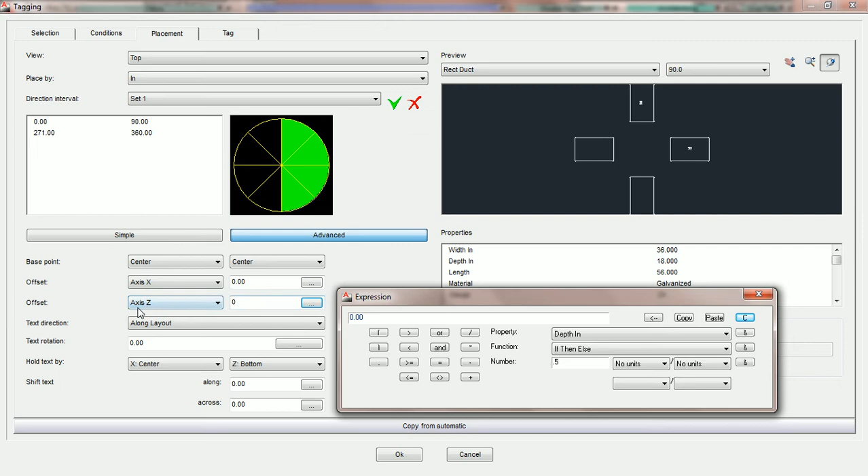What we're going to do is show you just one use for having formulas calculate your offset parameters for you. Right now we have the z-axis parameter set as 0, so the offset is 0 on the z-axis. We're going to press OK and run an automatic.

And you can see here that this automatic is running a length tag at all the proper positions. However, because the axis z is 0, the tag is in the dead center of the duct. And once again, if we put this on the left view, you can see that the tags are all placed perfectly in the center of the duct if that parameter happens to be 0.

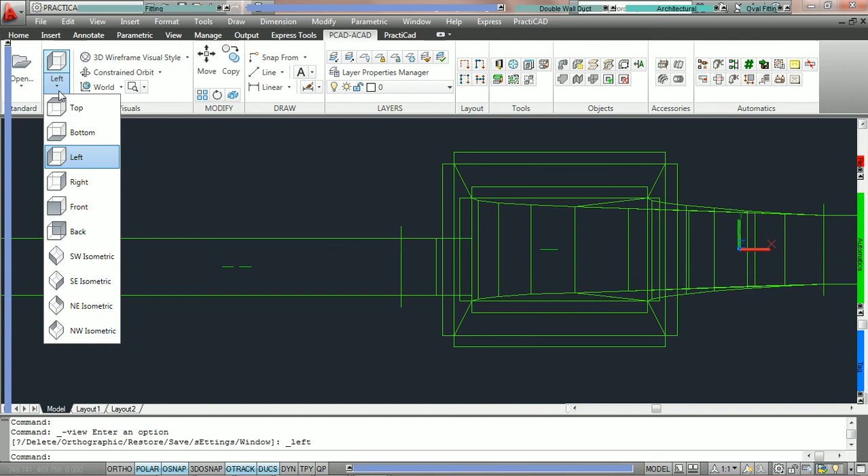Now what we'd like to do is make it so that we can have PractiCAD help us see these tags even when we're in a different visual style. For example, if we go into the hidden visual style, we cannot see the tags because they're inside the duct.

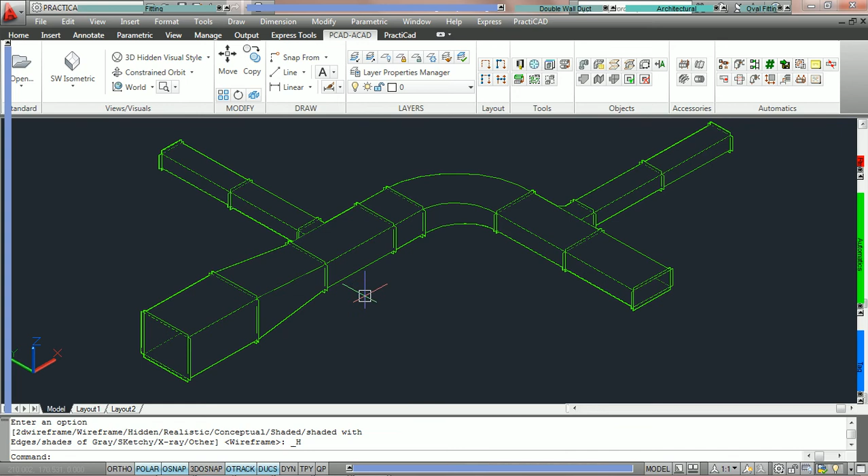Now though we showed you how to put the proper parameter for offset Z to get the tags to be higher than the duct, the problem is you're going to have different ducts of different depths on your drawing. And if you click on this duct here and look, the depth is 30 inches. So since the tag is in the center of the duct, the tag is sitting 15 inches into the depth.

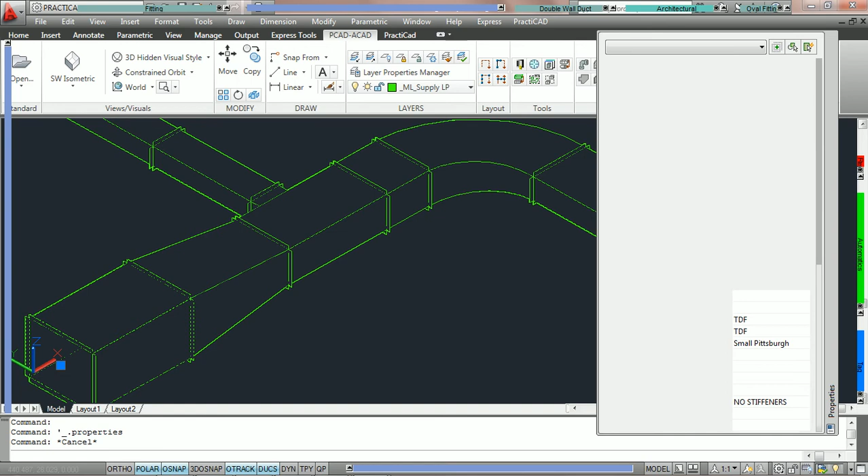That means if we want the tag to be on top of the duct so it's visible, we need it to be at least 15 inches high. However, if we click on this fitting here where the depth is 18 inches, if the tag is in the center, we need the tag to only be 9 inches higher than the depth of this duct.

So we don't want to create different automatics. Instead, what we can do is calculate the z-axis offset parameter based on a formula that utilizes the depth of fittings. If it was round duct, we'd use diameter.

So what we're going to do here is go into the auto tag icon and go back to the placement tab. And remember, PractiCAD remembers all of the last settings you used in this window, so you don't have to change anything but the difference between the last time we used the tool and the time we're going to use it now. So we're going to come right here to Axis Z, and click on the formula icon.

Once PractiCAD opens up the expression field, we're now going to put in the expression we'd like to use. Here what we're going to do is just paste one in. We've already copied it. We're going to use the formula 0.5 times the depth in, which means half of the depth. And then we're going to say plus 0.2.

And the reason we do this is because it moves the tags just 0.2 inches above the top of the fitting. This seems to work very well when you're trying to see through the realistic and hidden visual styles. You can try different parameters, but in this tutorial we're going to use 0.2, and most of the tags in the software that were set this way utilize this value.

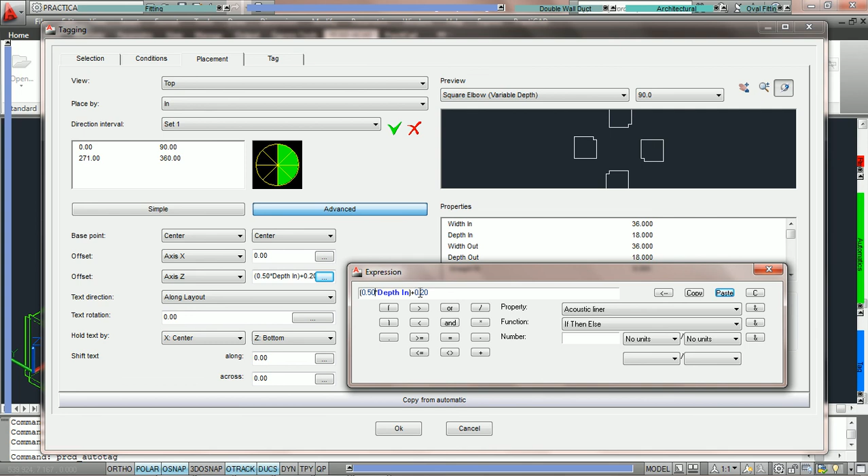So we're going to run this automatic by pressing OK. We're going to click on the duct. And now you can see that we've got the length tags on top of all the duct just a little bit. If we put it in left view, you can see that they're barely on top.

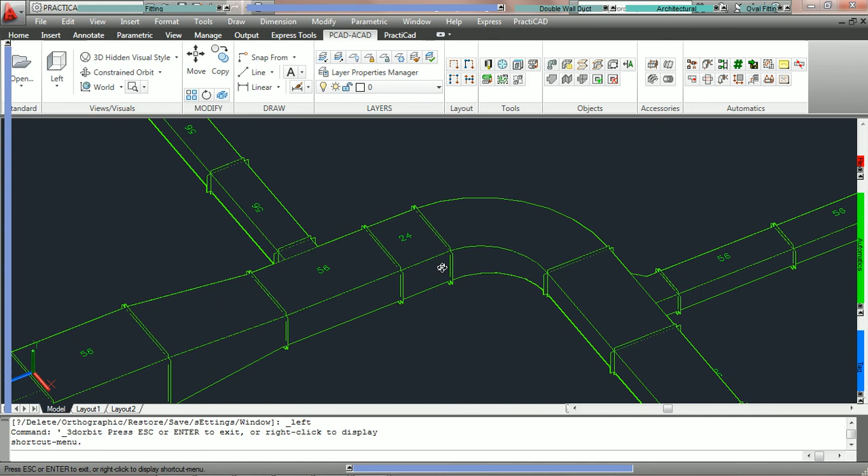You can almost not see it in these particular views, but the tags are just on top of each particular duct, utilizing the formula to calculate the offset. So this is a very useful tool. Here we're just showing you one particular case where you might want to utilize it, but you can have formulas calculate all of the offsets for your tagging parameters.